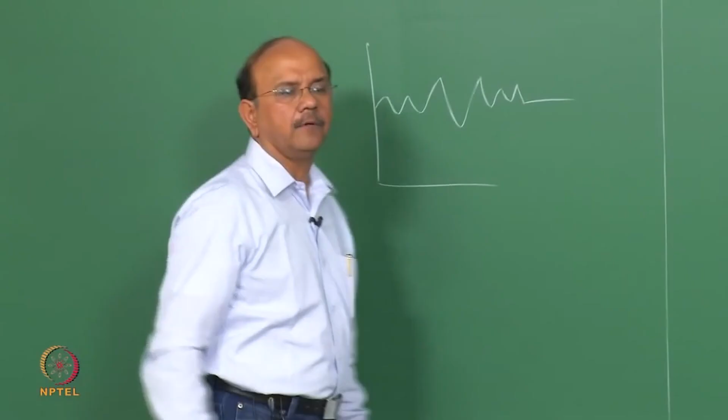We already saw that the random process is a family of random variables. Remember we did this in the case of the roughness of the road, as a random variable. We said we can take a number of measurements, so this family of measurements is now going to be used, and we can call this the ensemble.

Remember that the random variables have two indices. I put one in the bracket. The r can vary from 1, 2, 3, 4 and so on, and s is this distance. So zeta 1 of s, then zeta 2 of s and so on, are the independent realizations, as they are called, or sample functions. So we have a number of such sample functions, which we can call zeta s and so on. All these roughnesses form what we call the ensemble of roughness values.

Now there are two ways in which we are going to look at this. We can look at it at a particular value of Sn. Of course this Sn, or S, can be replaced by time, and you can define the whole thing in terms of time. Note that we can look at this at S1, and look at another one S2, and so on. So at S1 we have a number of what are called random variables, or the measurements we do at S1, and we do similar measurements at S2 and so on.

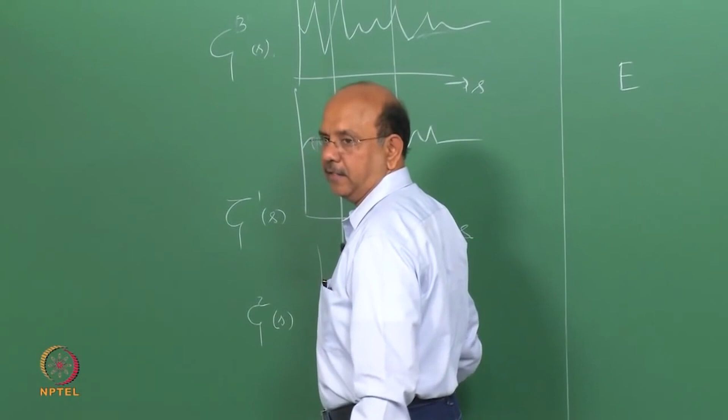The first two important parameters are called the mean and the variance. They belong to one set, say calculated at S1 or calculated at S2 and so on. So when I say mean or expected value, it is across this vertical line.

If I talk about the horizontal line, though it's distance, I would talk about time averages. Loosely speaking, it's a time average. So average can be taken along the vertical line, or along the horizontal line. Those are the two things: the first is with respect to one variable S1.

You can then look at how two points separated by a distance, say tau or time, are related. There are two definitions which characterize this connection between the random variable at S1 and S2 - we have to be very careful in using these terms.

This whole thing is one random process. Please note that this whole thing is one random process - the road is characterized as one random process. So it's not a different random process; it belongs to the same random process, and so they are the random variable.

For example, if I look at the acceleration levels in the seat, I can call that another random process. As we go along these roads, what is the acceleration level at the seat - that is called another random process. So I have another set of these values as well. Then I will combine both; we will see that a bit later.

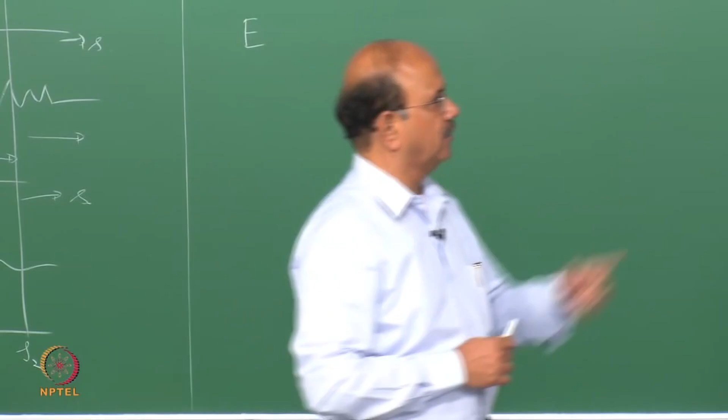The second one is auto covariance - there's a mistake there, it's actually auto covariance, not cross correlation. That is subtracting the mean, and I think there's a small mistake in that. It is again the auto covariance between the two. So the second line, that's the one.

Now we can calculate what is the difference between the two. The difference between this is the same as the difference between a mean and the variance. One talks about how much the variable is connected. The other talks about how much the distance away from the mean is connected. So for both, you look at one without mean and one with mean.

Usually in most of these processes, we make sure that the mean value - by adjusting the measurement that has been taken - can be made to be 0, in which case both these things would become equal, or in other words m would become 0. So the second one is actually the auto covariance, not cross correlation. Autocorrelation and auto covariance are given by these two equations.

We define what is called a correlation coefficient. What's the connection? Why are we doing this? What is the relationship between the two? Once we finish this, once we finish a few more definitions, we will look at what this actually means.

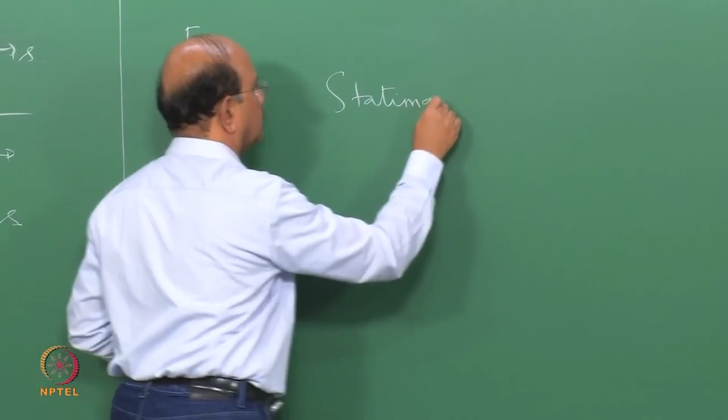So the stationary process can be classified into weakly stationary processes, or strongly stationary processes. We will not go into that detail, because it depends upon whether all the statistical measures, or all the moments, higher order moments, are the same, or do not depend upon where I put this line, but depend only upon the separating distance or separating time - all the higher order moments - that is very strongly stationary. If the first two moments depend upon this time tau, then we call this a weakly stationary process. We will go to ergodic next, then we will understand this whole thing.

Please note again, I am looking at it like this, the vertical segment - so it is independent of time. In other words, if I take that vertical segment and determine all my expected values and so on, or I take two other vertical segments separated by that same distance tau, then all the statistical parameters I calculate are the same. So this distance doesn't come into the picture, and that is what we call a stationary process.

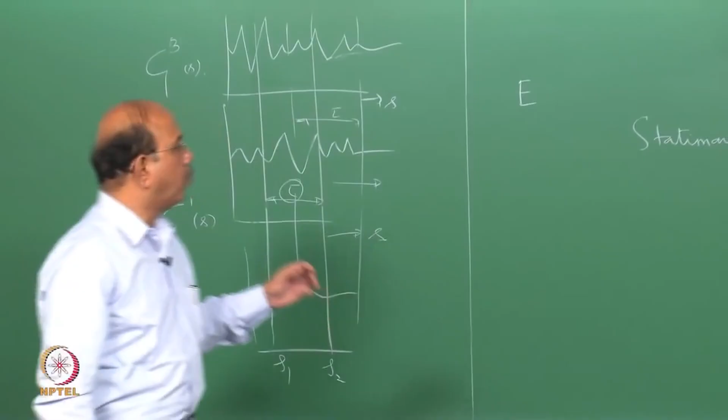As far as we are concerned, we are interested in the first two, and that's the first definition of a stationary process. But a more interesting process, because of limitations and other things, is called an ergodic process. It's a special case of a stationary process where one sample represents the whole of the random process.

So here I have to go to different roads and determine this. One sample determines the whole of this process. So I take a sample. If that sample determines all the statistics, then we call this an ergodic process.

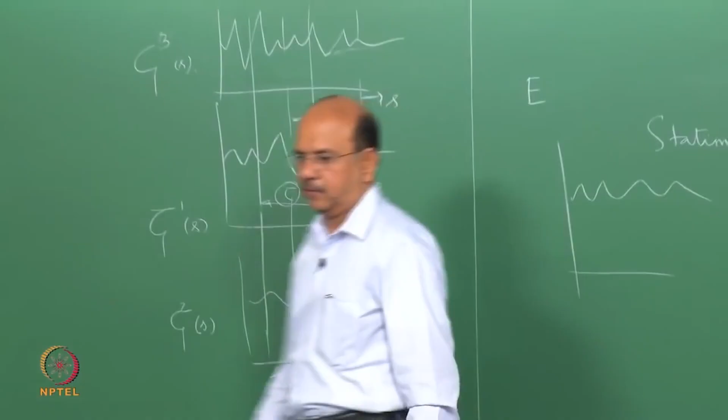More importantly, for the ergodic process, whatever time averaging I do along this, the regular time averaging, that reduces to the ensemble or expected values. So the time averaging gives me the complete statistical parameter of the whole random process.

So for that, should we have a long sample? We'll come to that. One of the conditions is that the length of this sample has to be big. We'll come to that in a minute. What should be the length of the sample?

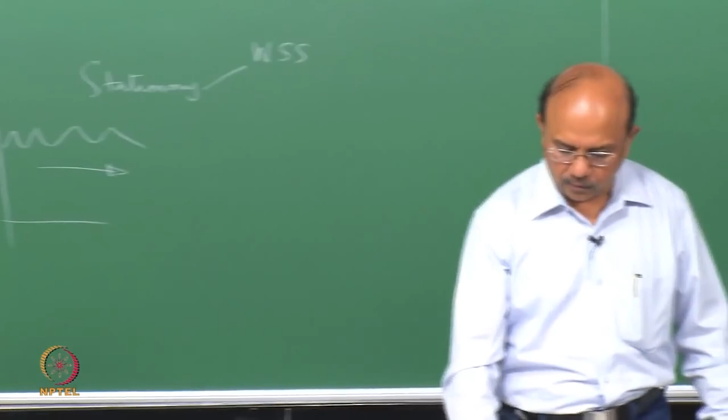We already said that if the mean and the covariance function are independent of time, we defined that as a weakly stationary process. So we said that if the ensemble averages are determined from the time averages of a single process, that's ergodic. Let's write down all the equations corresponding to that.

What am I doing? I am only defining. You can also write this as an expected value, it doesn't matter, but when you write this in terms of time, the calculation becomes quite simple.

So the first is the mean definition. Look at that, x tends to infinity, so I integrate over a very large length. It's very important that the lengths are large. So that is the mean across, that is the horizontal side.

So the mean, the variance, and the third, let's look at how it reduces. We will look at this: the probability density function will be Gaussian, and the third is what we call autocorrelation. The fourth is the mean square value, and lastly we look at autocovariance.

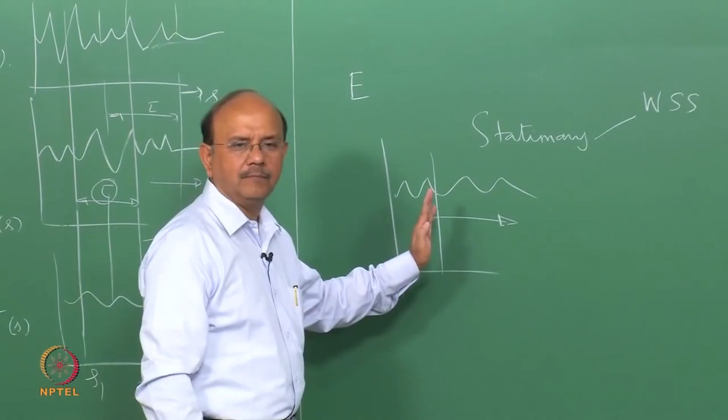Now, what do these things mean? What does autocorrelation mean? What does the autocovariance mean, and so on? It simply tells you, as a correlation, how far the signal that's happening at S1, the road roughness, affects something that happens at S2. In other words, what is the memory of a signal? This is not only for roughness, but also for any signal. So it looks at what is the memory of the signal.

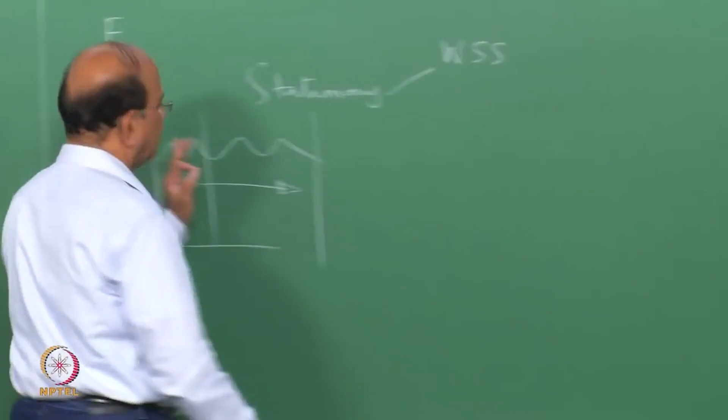If this is white noise, which means we will talk about the spectrum or power spectral density, which is distributed throughout, it is purely a signal such that even the next instant, delta t after time t, if this happens at time t, what happens at t plus delta t is also not related to t.

In other words, white noise is where there's a stick standing at tau equal to 0. If you substitute tau equal to 0 in the third expression, you would notice that it's nothing but the fourth one, r of zeta of 0, which is the mean square value of this variable. This means there will just be a stick and it won't be connected at all. Of course, this varies depending upon what the frequency contents are, and so on.

What is actually ergodicity? It's a very big question. It can't be covered in this course. There are what are called ergodic theorems and so on. We'll just follow a very simple method to understand what this ergodicity is.

What we said is that we have a time or a space average. Let's stick to the word time, since that's used in most textbooks. What we are saying is that the ensemble average, that is the expected value, is equal to the time average. How does this come about? Let's look at this carefully.

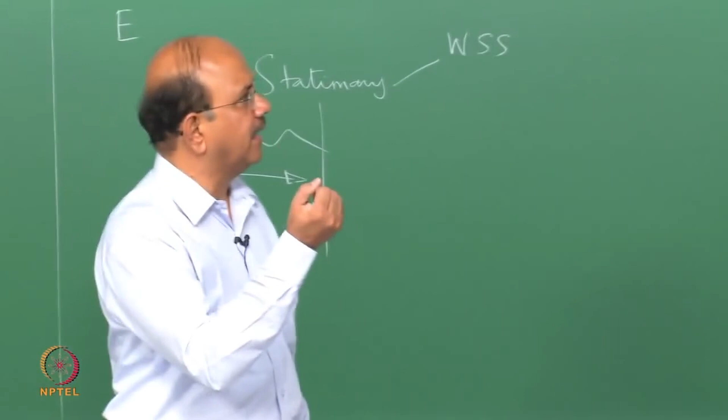So we define what is called the power spectral density. Ultimately we come to a quantity called power spectral density. This is the 6th important quantity. Look at mean, variance, autocorrelation, autocovariance, correlation coefficient, which is nothing but normalized by means of the variance, a square of the variance. And then we come to what is called the power spectral density.

Power spectral density is defined as the Fourier transform of the autocorrelation function. So in other words, what are we trying to do? We are moving from the time domain to the frequency domain. The autocorrelation function is in terms of the time domain, and now we are taking the Fourier transform of it, so we have moved to the frequency domain. So these are the two, the Fourier transform and the inverse Fourier transform.

I do an inverse Fourier transform of the power spectral density, and we get what is called the autocorrelation function. Substitute tau in that second expression, and you would get the meaning of what power spectral density is.

In order to understand what this power spectral density is, what this power or spectral density, sometimes called the spectrum, really means, the expressions which I had written are very straightforward. They are just that the mean square value, which is the autocorrelation at tau equal to 0, is what's defined in the third line, that is this one. We had seen this before.

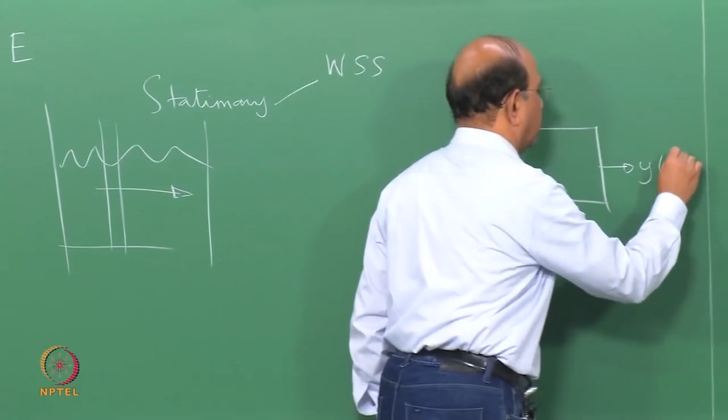Now let's understand this more carefully. Let's for a moment take that second expression for granted. Let us say that I have a process where I send in an input and I get an output. Let us say that the frequency response function of this process is h of j omega, and the impulse response of this is, say, h of t.

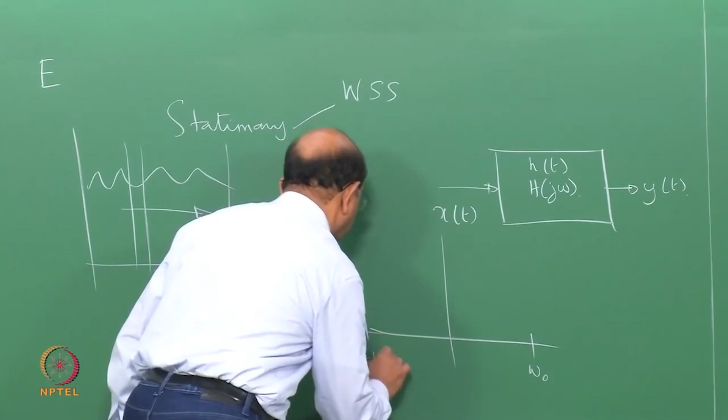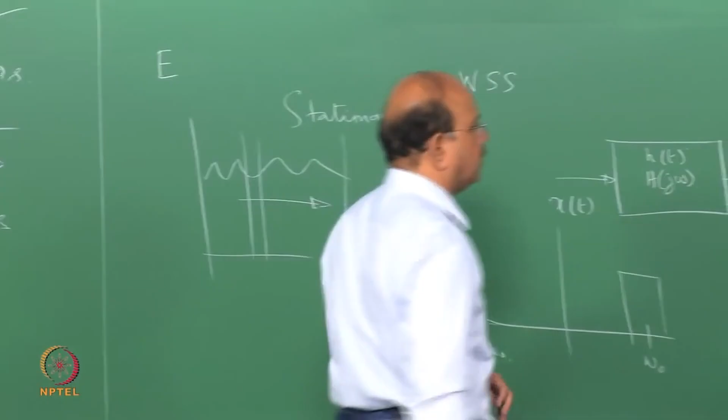Let us now calculate the expected value of the square of this output, in other words the mean square value of y. Usually the square of these quantities, electrical engineers are fond of calling them power. It comes from I squared R, so usually the square of a quantity is called the power.

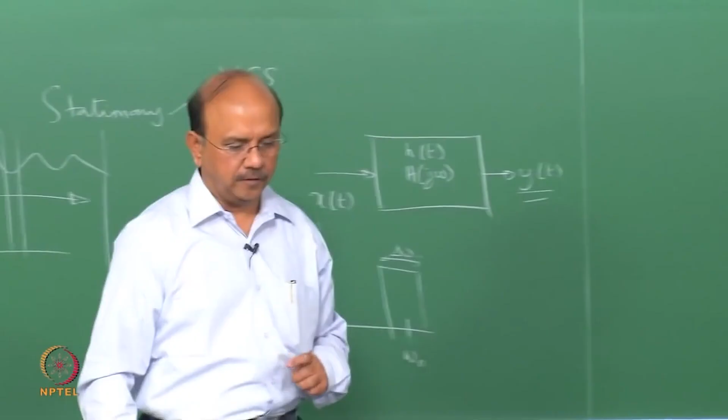That pass band power is the power spectral density multiplied by d omega. As the band becomes smaller, you can understand that the power passed in a very small range is nothing but given by the power spectral density.

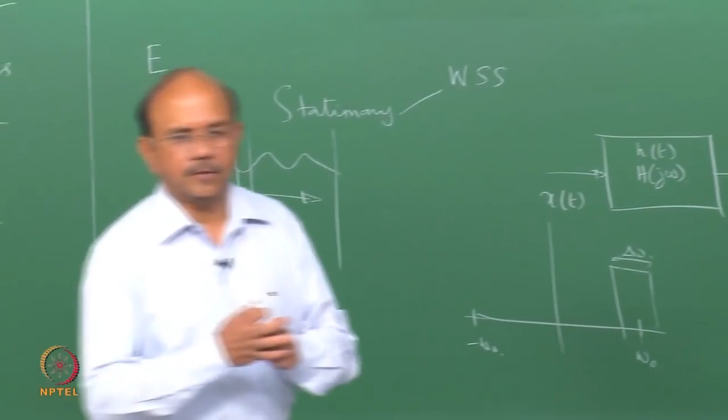Some software used in mechanical engineering calls that S_y(omega) into delta omega as auto power. Power spectral density is called so because the word density is used since when you multiply it by delta omega, it gives you the power. That's why the density term is added. Many NVH softwares use the term auto power, meaning they multiply this with a band of delta omega, so that multiplication, what is inside the integral, is what they call auto power.

So in other words, the spectral density or the spectrum gives you the energy content of the signal, and we are now looking at it in the frequency domain. The energy content at various frequencies is what is determined by the spectrum.

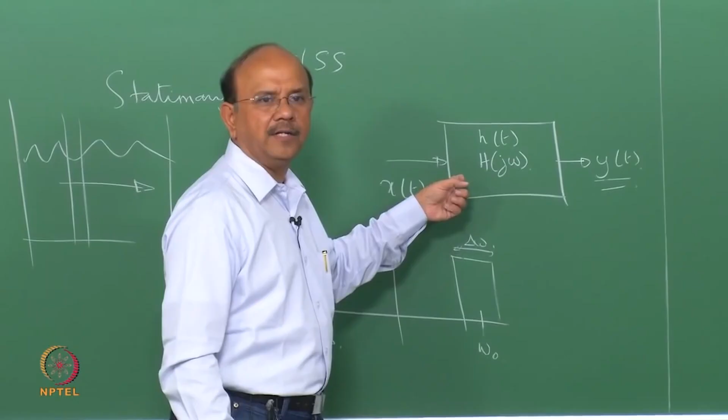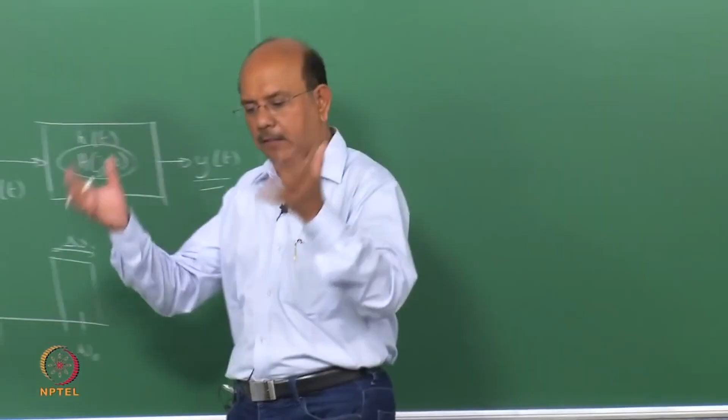So for example, if I have a vehicle, say we looked at a quarter car model, and we had looked at various frequency response functions at various places. Now if I want to find out the power spectral density at the automobile's sprung mass, say the base of the car, the floor of the car, we already know what is the frequency response function.

We had written that. Now that frequency response function, the magnitude square of the frequency response function, if I now take - note that it can be complex, so we're looking at the magnitude of the frequency response function - square of that multiplied by the input power spectral density gives me the output power spectral density.

So if I want to find out at the seat, I put in another frequency response function between the road and the seat, and then I can find out the power spectral density at the seat location. That brings us to a very important thing, the properties of these functions.

The autocorrelation function, by sheer definition, remember there was xt and xt minus tau. So from its definition, it is an even function. In other words, the autocorrelation function of minus tau is equal to the function of tau. So that's the first one.

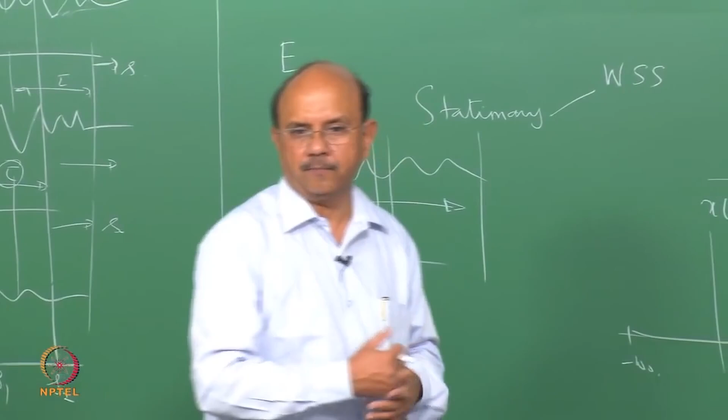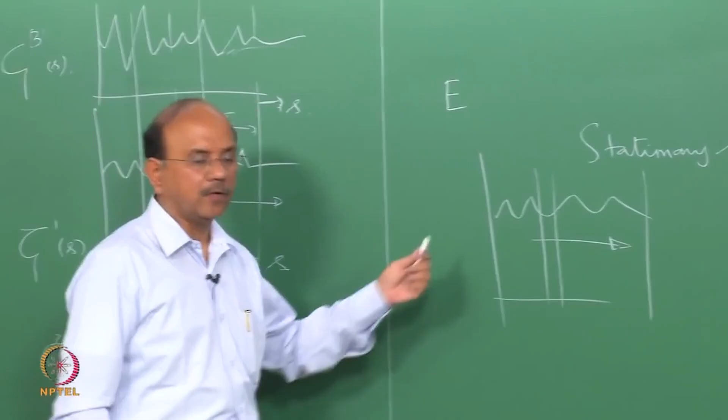We can also look at cross correlation functions. These are the cross correlation functions between two different random processes. That's very important to understand. What we are looking at, this whole thing is a random process. Though we call this one random variable and another random variable, they belong to the same process - that's why we use the term auto, because it belongs to the same random processes. So we can connect two different ones - the cross correlation between them.

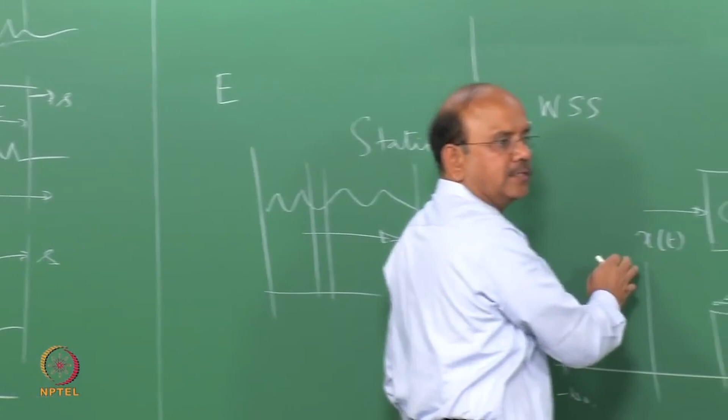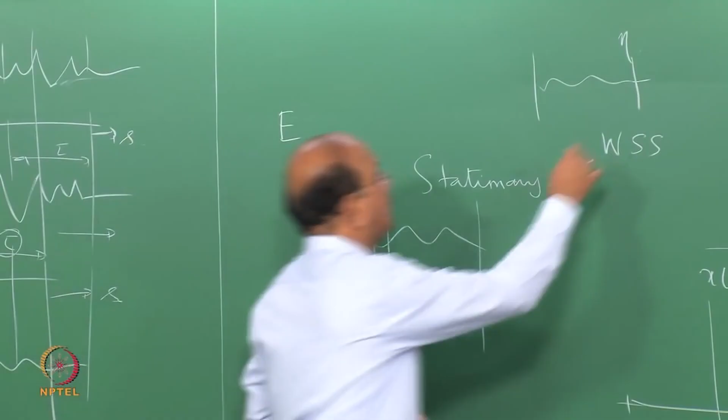What happens when you give an input here? How is this correlated with another random process at a different time? If I have another random process, I have two random processes - let me call the other one eta. It can be anything, maybe what happens at the seat location, or something else. Now, the cross correlation is the statistical connection between, say, that road input at S1, and what happens, the statistical connection between that and at S1 plus tau.

Because the distances do not matter now, since we are looking at something else, S has to be - though we define the road in terms of distance, it's proper that we come back to time rather than stick only to distances. So please note, though I used it interchangeably, it's always better to look at that in terms of time. So we define what is called a cross correlation, cross covariance, and cross spectral density.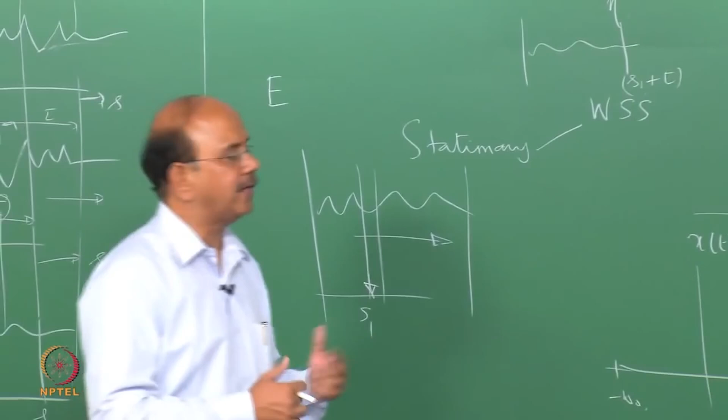Again, through the definition we can see that the cross spectral density is a complex valued function. Obviously, it's a complex valued function. We also have to look at the phase, because we are looking at two different points, and this is in the frequency domain, so we look at the phase as well. And the cross correlation function is neither odd nor even - go back and put that in the definition, you would see that's the expression you get.

One of the quantities we saw was the correlation coefficient in the time domain, and the corresponding quantity of interest in the frequency domain is called the coherence. So all of you know what a correlation coefficient is. If the correlation coefficient - all of you know - varies from -1 to +1.

Rho is between -1 to +1. That's because we had normalized it by means of the variance. So it's simple probability.

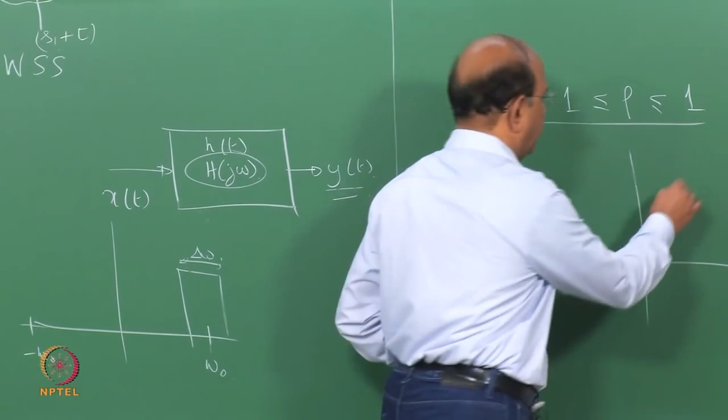If there is a perfect correlation, you can plot the two variables and all the points will fall in a straight line. If there's a negative correlation, when one is positive, the other is negative, and so on. Negative correlation means that when one factor increases, the other decreases.

So that is correlation defined in the time domain. What is correlation in the frequency domain? You should be able to imagine time and frequency in a very similar fashion. The x-axis is time, now the x-axis becomes frequency. It doesn't matter, the x-axis just becomes frequency. So in the frequency domain, we look at this whole thing in terms of f after we do the Fourier transform. In fact, today there are techniques available to look at fatigue life in the frequency domain. So you can do that in time domain, or you can do that in frequency domain.

So coherence is extensively used to look at the input and output connection in many experiments. For example, you would do experiments in the vehicle dynamics lab, in which case you would look at coherence all the time, to see whether the output you measure is pure noise, or whether it is correlated with respect to the input.

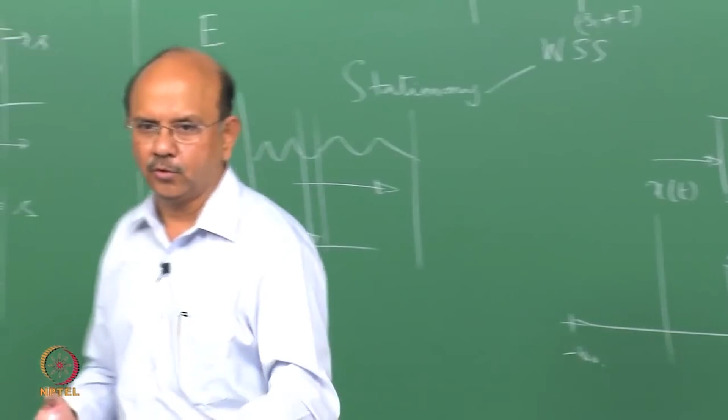That you look at in the frequency domain. If the coherence is near 1, say it is 0.9 to 1, then you know there is good coherence between what you gave and what you are measuring, meaning what you measure is due to what you gave as input. If there is no coherence, then what you are measuring is noise, it has nothing to do with what you gave as input. So coherence is an important quantity, especially in experimental work.

One quantity of interest is the mean square value of the acceleration. Why are we doing all this? Ultimately I measure or calculate the power spectral density at the seat. We know the connection between power spectral density at the road and power spectral density at the seat. Now, why am I doing this? What am I going to get out of it?

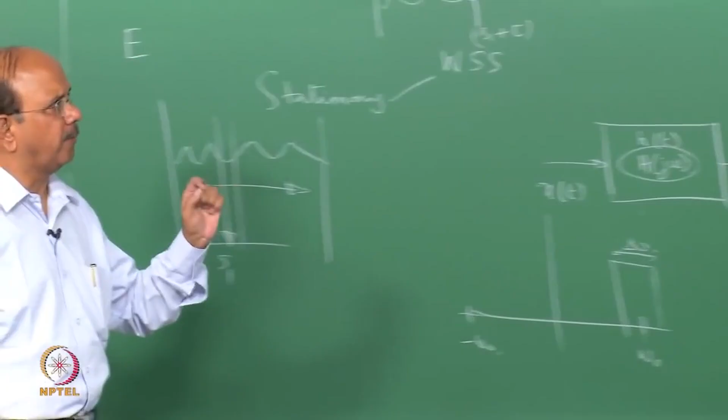One of the simplest things you'd notice is that acceleration levels, what you feel when you do a drilling or something where you're subjected to accelerations, are a very important input of vibration to our body. In other words, our tolerance levels depend upon the mean square value of the acceleration.

Now what is the mean square value of an acceleration? Remember, y squared, the same thing, the mean square value of this. Now instead of y, we say it is the mean square value of the acceleration. We know this is nothing but the integral of the power spectral density. This is exactly what we did in this problem, the power spectral density in a band omega 1 to omega 2.

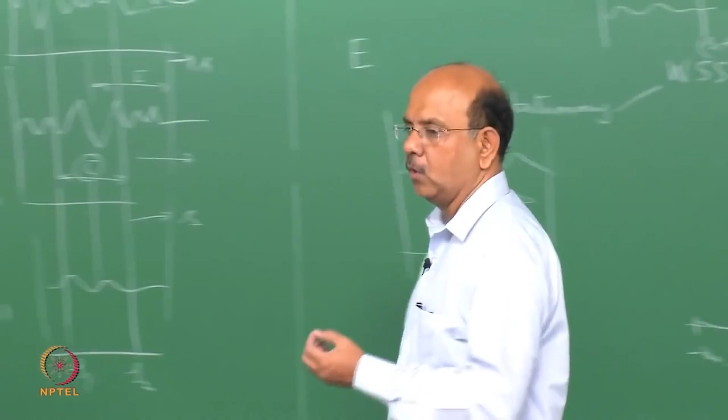We have a central frequency like this, and we take the band from omega 1 to omega 2. This band is called a 1/3 octave band. There are 1/6 octave bands and so on. For the 1/3 octave band, the upper frequency or upper bound is given by omega naught times 2 to the power of 1/6, and the lower frequency is given by omega naught divided by the sixth root of 2, and so on. When you calculate that, it becomes 0.89 to 1.12 times omega naught.

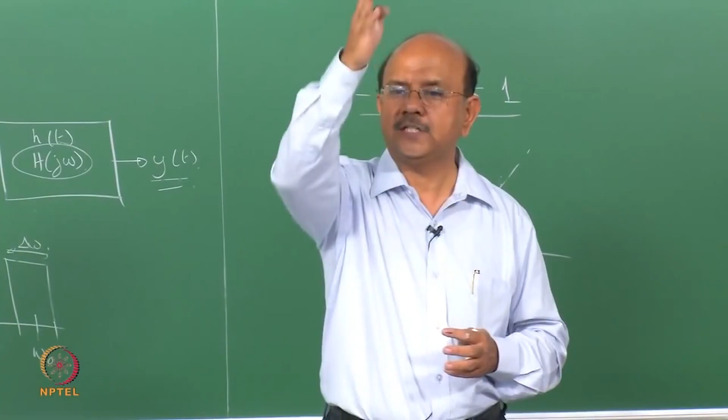Octave is a very important parameter, and we'll see that later, going on to noise and vibrations. The RMS acceleration is now calculated based on the power spectral density. This RMS acceleration is related to our ability to withstand vibrations. Now, for various frequencies, I can calculate the RMS acceleration from that equation. So in other words, I can have a plot of frequency versus the RMS acceleration.

That expression gives you the RMS acceleration, right? It doesn't matter, I am looking at power spectral density anywhere, so you can take it as a general expression. We are talking about power spectral density at the seat, so yes, S is S_AA. In any A we can take, right?

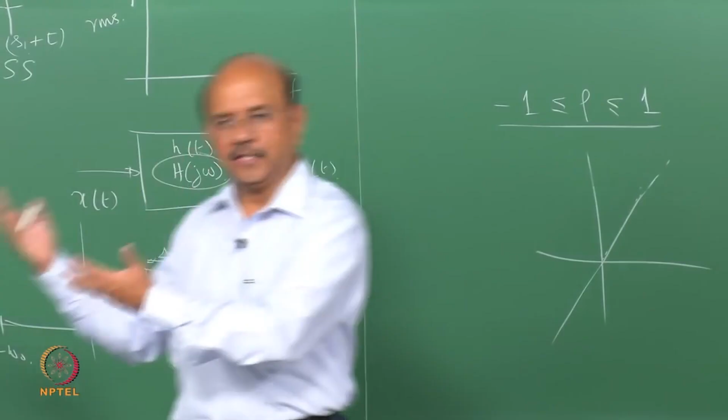No, this expression here is now substituted in terms of the seat. If you want to call this eta, you can call this S_eta. Suppose this is the road input and this is the seat. Y is the seat output, and if I calculate the power spectral density at the seat, call that S_eta, which is nothing but, remember, that h squared value - I'm talking about this value.

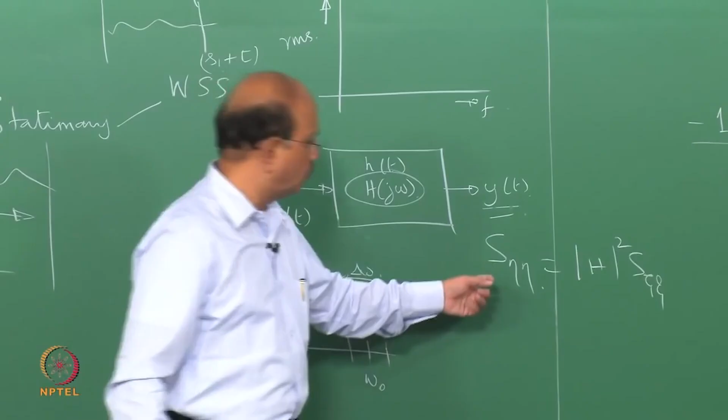So take it to the seat. That is what goes inside that integral. Take one minute, let me explain this process. Take 1 omega, put that as a band, and calculate the 1/3 octave band at that value. So I get one value for a mid frequency of omega by integrating that value.

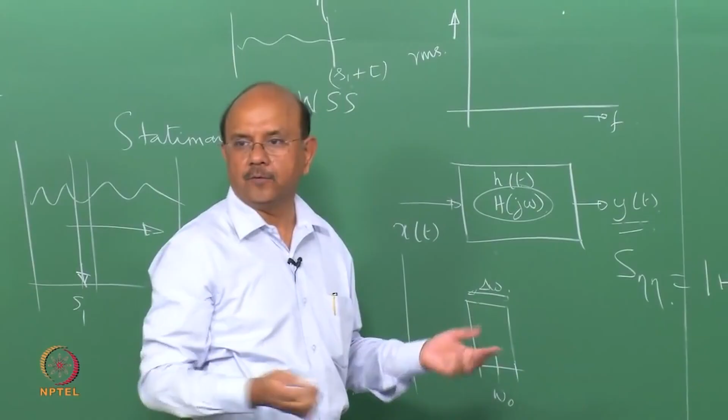That is the RMS acceleration for a frequency. So like that I will have RMS acceleration at various frequencies, giving you RMS acceleration as a function of frequency. It will still give you the root mean square value of your seat position - yes, root mean square value of the seat position.

But note that what I am measuring as an output is the power spectral density of the acceleration. If I measure the power spectral density of this output, that is what I measure. I can measure whatever I want - suppose I put an accelerometer. Usually what I do is put an accelerometer and measure it, and what I get out is the power spectral density of the acceleration measured from the accelerometer, and that is what I'm going to use. The simplest and best method is to put only an accelerometer and measure it. Now this is called the RMS acceleration, right?

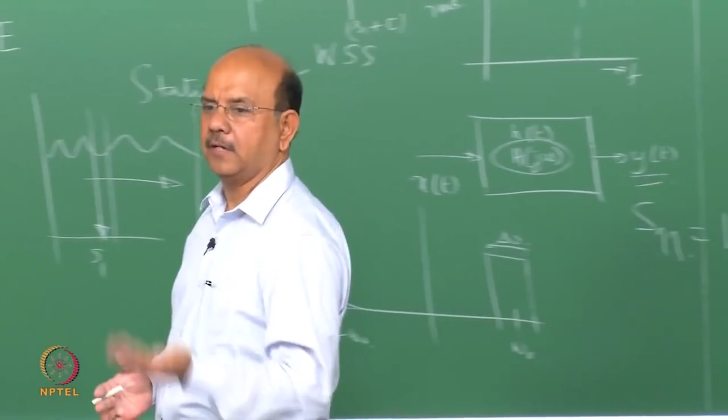So usually you can put an accelerometer at the seat, at the back, and at the floor, and so on. Now a lot of tests have been done from the point of view of human vibration tolerance, and it has been found that there is a difference in the tolerance level of a human being depending on whether we are subjected to, say, seat vertical acceleration or horizontal acceleration.

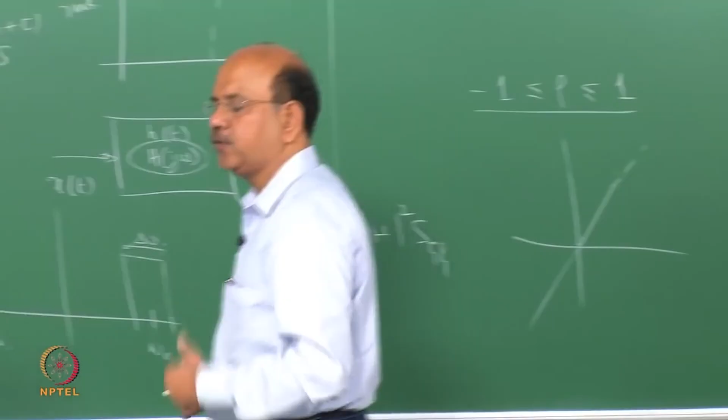I'm sure this has been covered - you talked about a very famous standard, ISO 2631, in your earlier course on ergonomics, because that standard is essentially what the whole of ergonomics is about. It's a huge standard, we don't have time to cover it here, but once I know how to calculate that RMS acceleration, there are what are called weightage factors, which are different for vertical vibration versus horizontal vibration. With these weightage factors, we will understand the tolerable limit, whether we are going to be comfortable or not. We'll talk about that in the next class.

The last topic we need to cover, which we'll do in the next 10 minutes, is what is called road roughness. You had already seen what power spectral density is, and that it's a very important input to this whole problem, and road roughness is actually that input. Remember, many of these equations can be solved either in the frequency domain or time domain, but if I have to give the road as an input as a power spectral density, it is in the spatial domain.

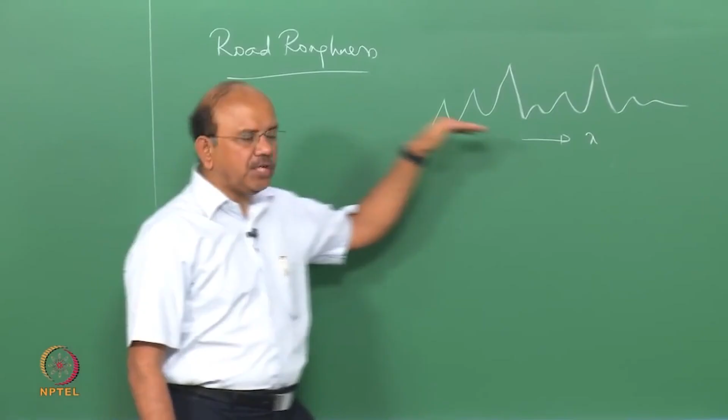In other words, when you measure what is called the road profile, this would be in terms of distance x, but the actual power spectral density, from which you can get the autocorrelation and so on, is actually measured in terms of time. So we have to have a relationship between the spatial frequency and the temporal frequency. In other words, when the velocity of the vehicle is v, obviously the frequency with which the vehicle gets excited would be a function of v.

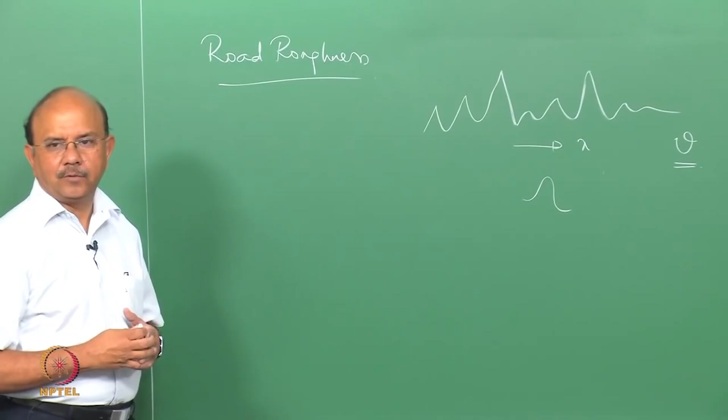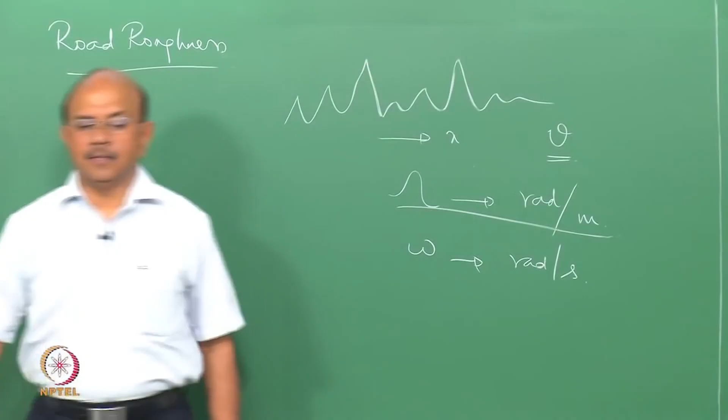If capital omega is what we call the spatial frequency, it is expressed in radians per meter. For the problems you do, you require the same thing in terms of radians per second. So I have to convert radians per meter, which is a road characteristic, into a characteristic input to the vehicle, and that comes from v, the velocity of the vehicle, expressed in meters per second. So omega, in radians per second, is given by capital omega, the spatial frequency, multiplied by v. Capital omega is radians per meter times meter per second, so this becomes radians per second.

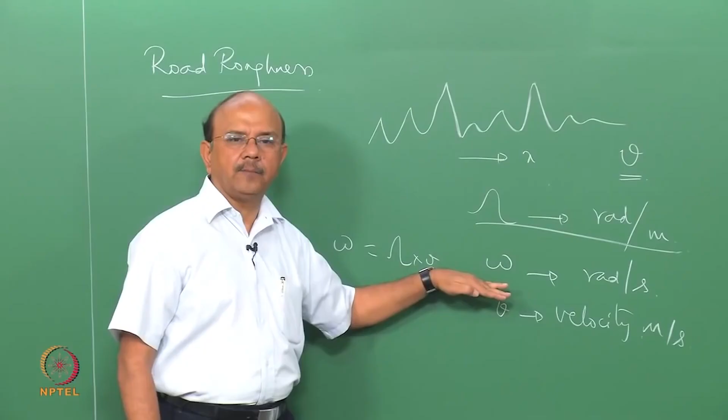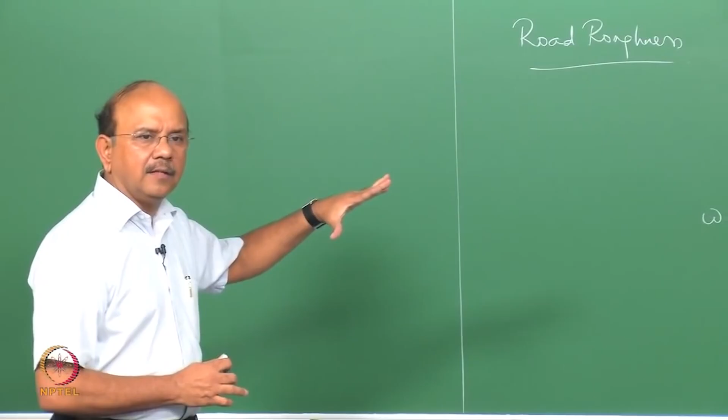This is the first thing we need to understand when we convert spatial frequency, or spatial power spectral density, into a power spectral density which goes as an input. I don't want to call this temporal, just that as an input, when the power spectral density goes into our calculations, omega should be in terms of temporal frequency, that is radians per second. This is a nice way of distinguishing between the road and the vehicle.

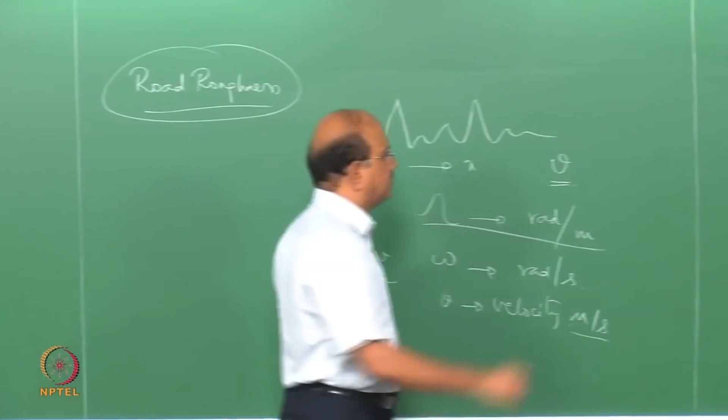So that brings us to the topic of how you specify road roughness, how you characterize the road. There are a number of ways to write the equation for the power spectral density of the road. The power spectral density of the road, written in terms of capital omega, meaning radians per meter, is given by a characteristic power spectral density phi naught multiplied by omega naught by omega, the whole raised to power w.

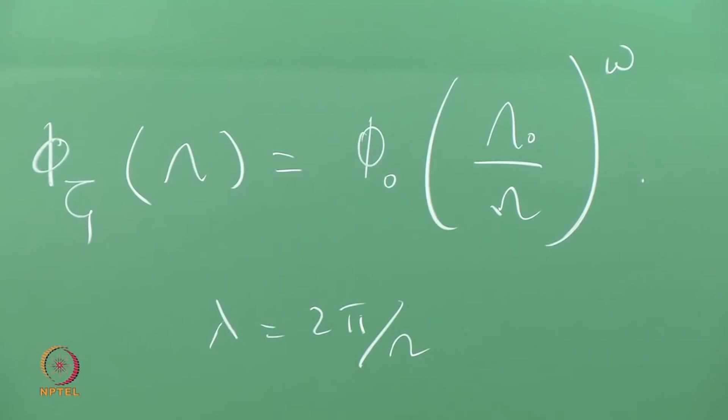The w indicates the waviness, and w varies from 1.75 to 2.25. Of course, the wavelength is 2 pi by omega. The usual practice is to put w equal to 2.

Omega naught specifies a characteristic frequency, a standardized spatial frequency. We will see in the next equation how we characterize this standardized spatial frequency. This was one of the first equations that were written.

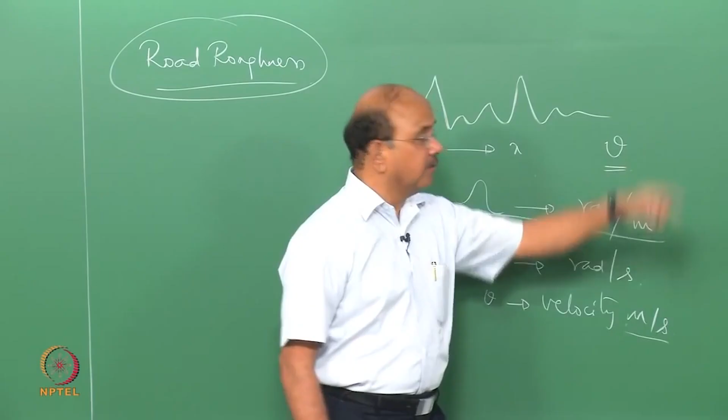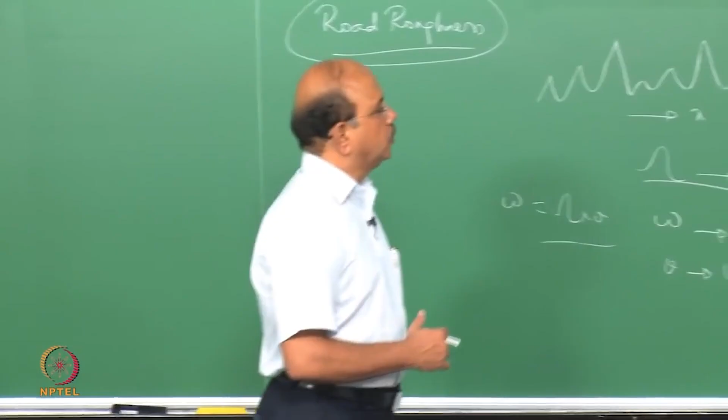The equations were further modified later, and there is an ISO-specified power spectral density of the road. You want to calculate the power spectral density in terms of temporal frequencies, radians per second, so we do some small manipulation. The ISO came up with a modification: if you plot it on a log-log plot, there are actually two different slopes in the log-log plot of frequency versus power spectral density. So it's good to plot it this way because of the type of equation involved, and the equation you get is something like this.

For omega greater than omega naught, the equation is similar, except omega is raised to the power w2. So in other words, there are two slopes, characterized by two equations, or two w's, w1 and w2.

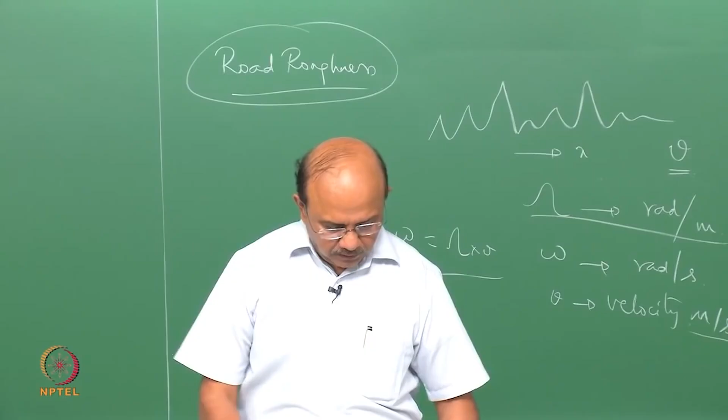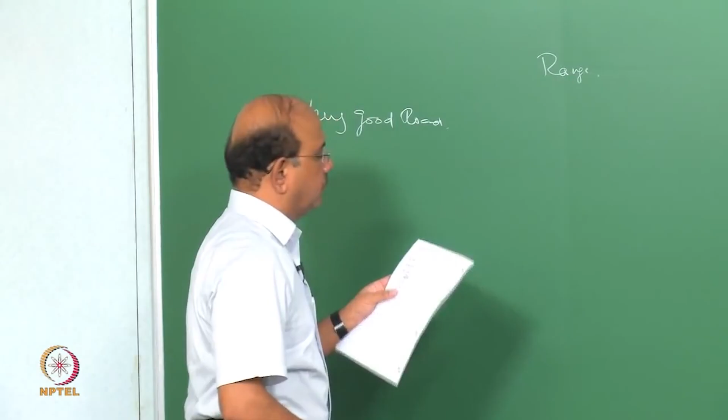Now good roads and bad roads are characterized by these W1 and W2. For example, for a very good road, the standard range of W1, W2 is less than 8, meaning 0 to 8, with a geometric mean of 4. This is called an A class road.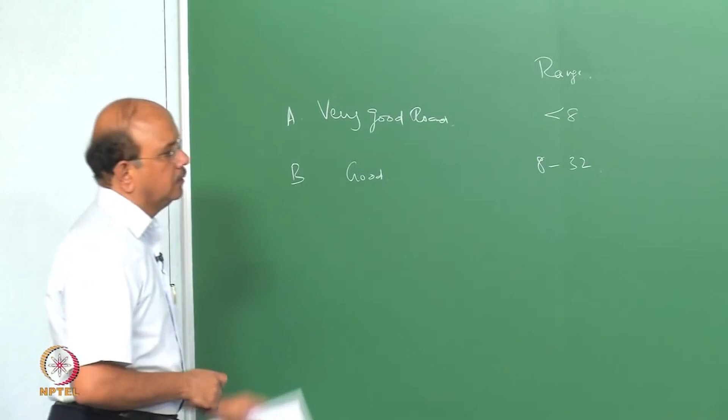For a B class road, which is a good road, this range is 8 to 32, and that is the phi naught value. Then C, an average road, has values ranging from 32 to 128, and so on. There is a poor road which ranges from 128 to 512, and so on.

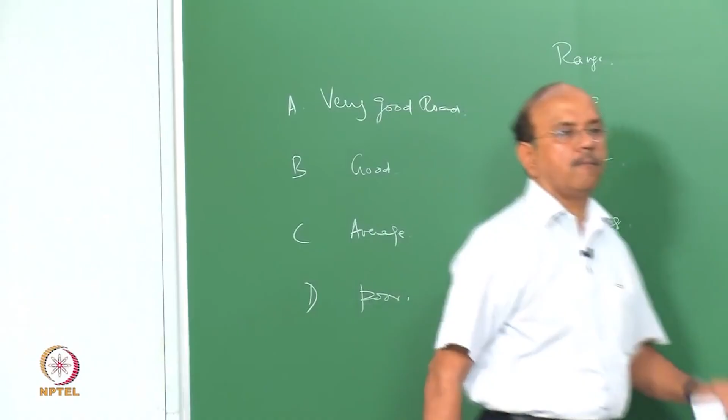The usual practice is to have W1 be 2 and W2 be 1.5.

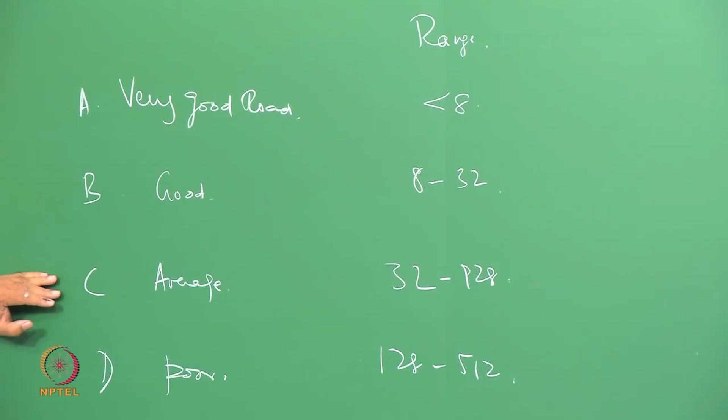So the lower bound for an average road, if you want to do an analysis, you replace this phi naught by 32. That gives you the lower bound, with omega naught equal to 1 by 2 pi and phi naught equal to 32. For an upper bound, you replace that phi naught by 128 and put that here.

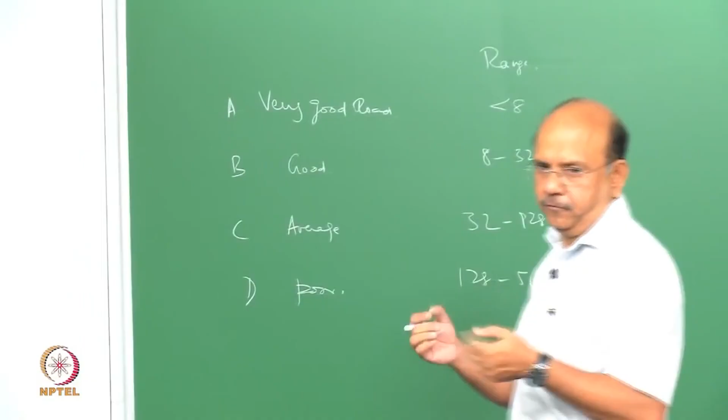So for an average road, I can't give you one figure, it varies from 32 into 1 by 2 pi omega, whole power 2, and then again the same thing whole power 1.5 when omega naught changes.

This is a very standard ISO standard, but people in recent times have issues with this. The issue is that when omega, the frequency, if you really look at a graph, it would look something like that with respect to omega versus this phi.

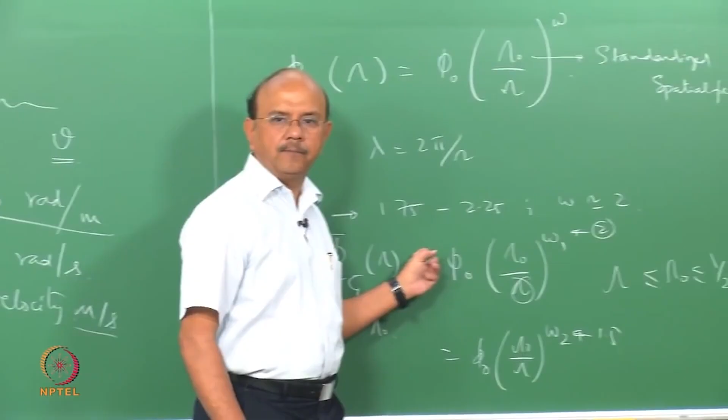There have been issues with this equation. The issue is that as the omega value tends towards 0, the spectral density shoots up and goes to infinity. The variance reaches infinity at omega equal to 0. This gives a very unrealistic value as you move omega closer to 0 — the error is very large because of that fact, that as omega tends to 0, this tends to infinity.

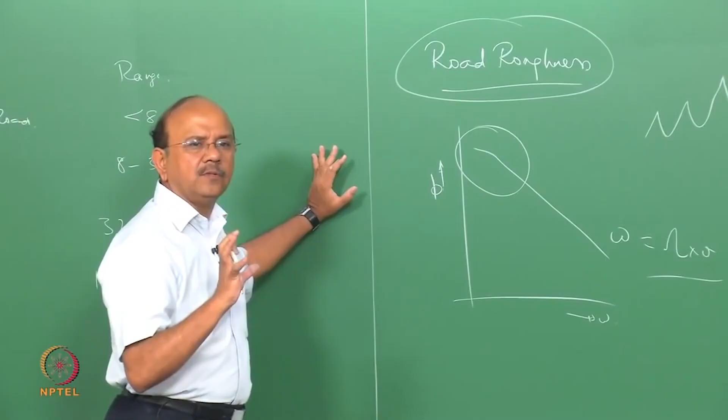So in order to avoid this, essentially what you do is put down an equation. For example, if you want to model your vehicle on a road, you have to do a profile measurement, and then fit a curve, given by an equation. So it's very important that you identify a road with an equation of this form, because of this difficulty.

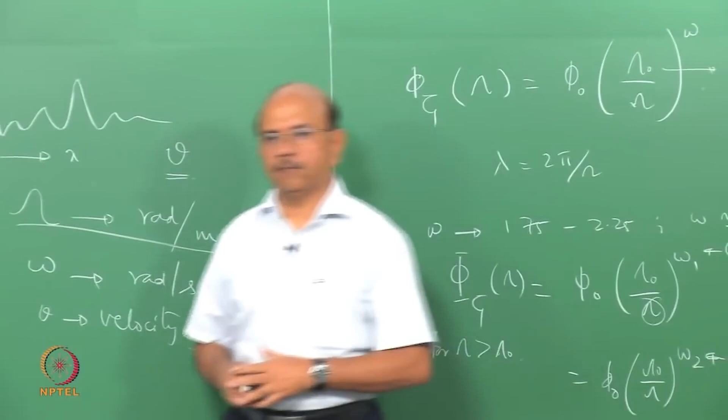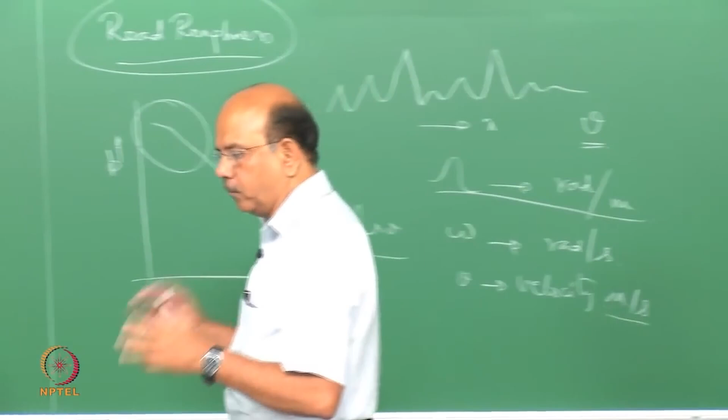There are a number of issues. For example, this gives what's called white noise, but roads are colored noise, with a number of parameters. We are not going to cover all that in this course, but there will be a course on NVH if any of you want to take it, maybe next semester, two semesters from now, in the January session, where the first part of the course will cover a lot more on random vibration and signal processing, including detailed analysis of the road, white noise, colored noise, and shape filter which converts white noise into colored noise — all covered there.

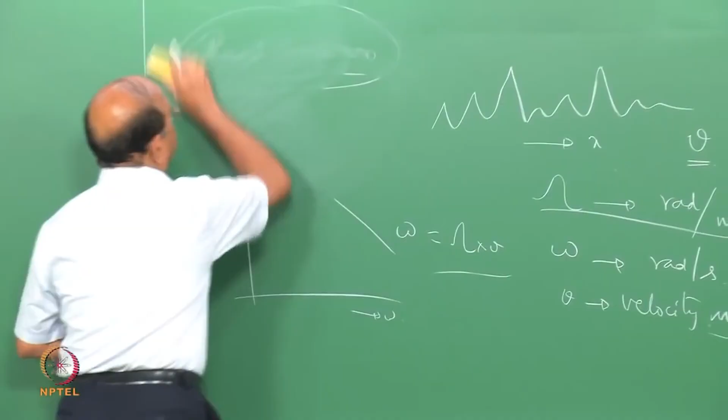So the only thing I'm going to write down before I close this topic is that there's been changes in the way the spectral density is written, because of this difficulty that as omega tends to 0, the spectral density goes to infinity.

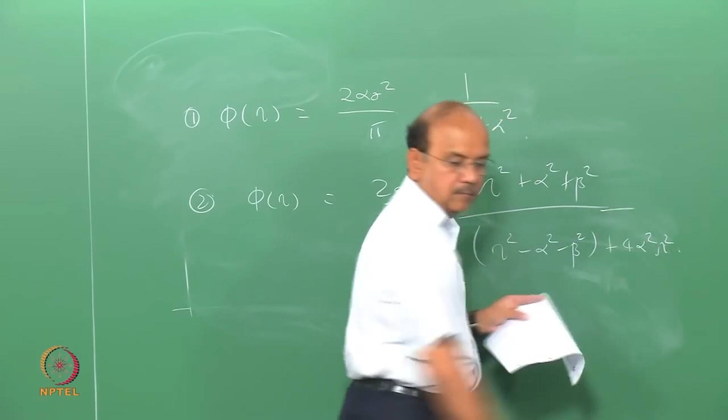So in order to avoid that, this kind of unrealistic behavior is avoided by using other types of equations. That's one type, and the other type of equation that's written, and so on — these are other types of equations which give a more realistic picture of the actual road measurements, especially as you move towards omega being small, you get a much better picture.

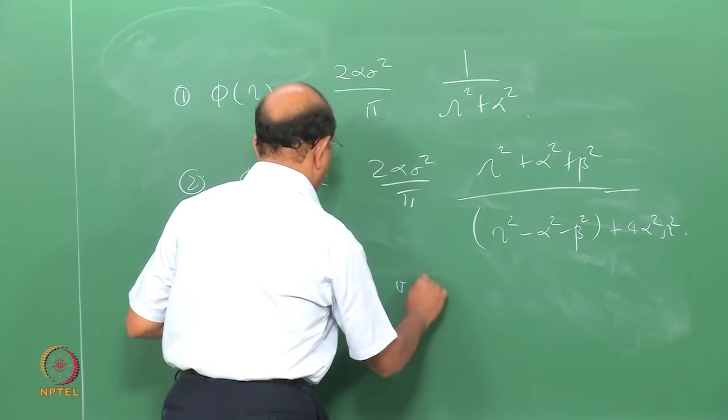And of course, when you want to convert it into omega, substituting for V and so on, you would notice that we can write down V phi naught into omega naught. Say for example, if W is equal to 2, you can write down that as the equation.

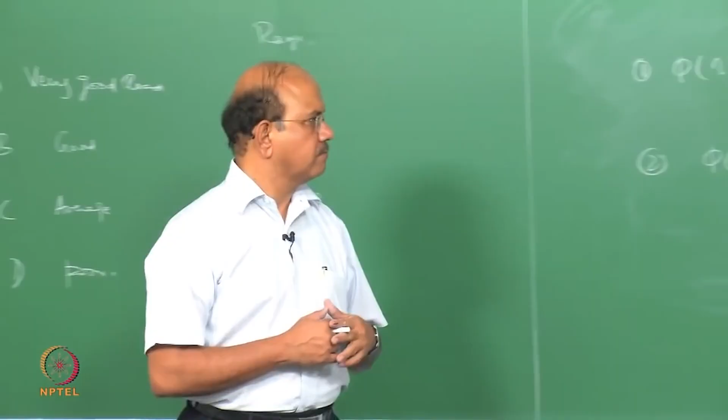There are a lot more issues in random vibration. Because of lack of time and this being the last class, I do not want to go into further details. People who are interested in some more details can look at Gillespie. Others, if you want more details on shape filter, white noise, colored noise, can look at a paper by Sheelan in the journal Sadhana.

Okay, we'll stop here, and this course will end with this, and we will continue that in the next course. Okay, thank you.